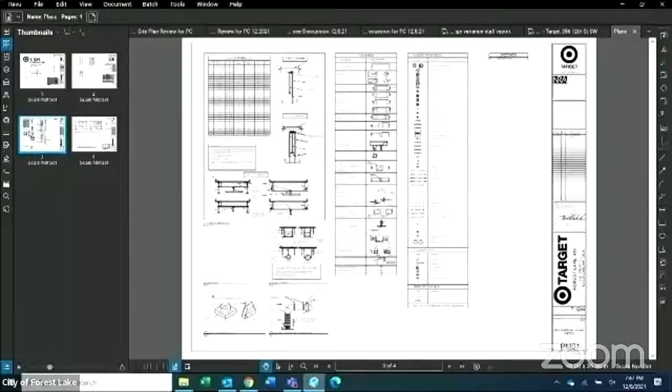Target is requesting a site plan amendment to allow additional curbside pickup parking spaces. The site currently only has 8 curbside pickup parking stalls. The new layout of the parking lot would reduce total parking by 6 spaces due to the spacing of access aisles within the new layout, for a total of 624 parking spaces. The applicant is also requesting 12 signs designating parking space numbers to indicate pickup stalls, a curbside pickup beacon, and a new crosswalk from the store to the new curbside pickup parking stalls. No other site improvements or exterior building extensions are proposed.

I will briefly discuss some of the items—feel free to stop me if you have questions. For setbacks, lot size, and building placement, the proposed site plan amendment doesn't alter the setbacks, lot size, or building placement; these were part of a site plan approved in 1999.

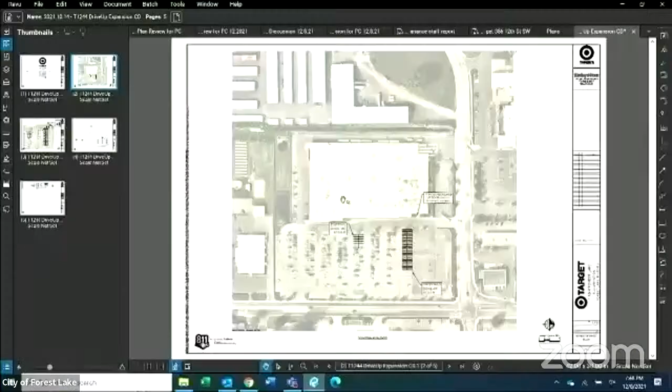Regarding parking and circulation, the curbside pickup stalls are being shifted from the west side of the property to the east side, as you can see on your screens. This is to provide a path with minimal obstacles for Target employees running out orders. The proposed parking stalls are approximately 9 feet in width, which meets current zoning code standards.

Regarding signage, a provision in the zoning ordinance allows for signage in parking areas when necessary for orderly operation of traffic movement. In this case, the signage will indicate where the pickup parking stalls are so customers can easily find them. The site plan amendment does not alter the trash enclosure, lighting regulations, or landscaping regulations for the site—we're really just looking at the additional curbside pickup and signage.

The recommendation is that the Planning Commission review the proposed curbside pickup parking stalls with the accompanying signage. If the Planning Commission finds the request conforms to city standards, it should motion to recommend the site plan to the City Council for approval, subject to the conditions listed in the staff report. I'd be happy to answer questions. Any questions for city staff?

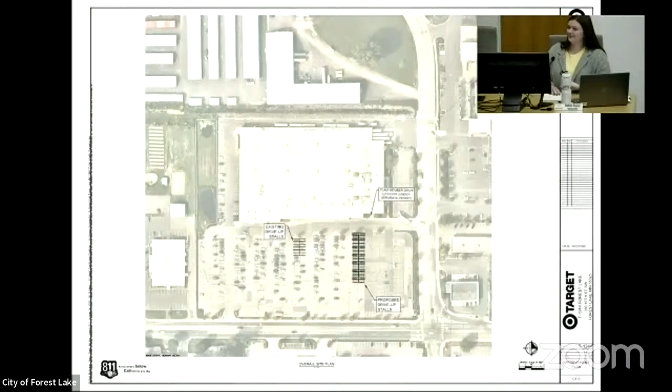Mike: Every time I look at this, I see the crosswalk for people coming out of the Target store, and then the crosswalk is at a 45-degree angle coming to the middle of the parking lot. Wouldn't it be easier to make that crosswalk straight across and move all that parking north one section? Then you've got a straight shot, everything's in line, and you don't have crosswalks going from one side of the parking lot all the way to another system—it just seems kind of weird, that's just my personal view.

I think they're trying to preserve the straight shot for customers and make the angled shot for their staff. But there's still a whole other row of parking—another double row to the north, there's 2 sets there. My point is if they moved all those stalls north one section, to me it makes common sense that it's just a straight shot—everybody's there, you can drive in and out on both sides. It's a lot of parking for the employees, but it's just a personal thing.

That's all I noticed. You go to most stores, it's a straightaway shot for all the pedestrians. You're not going at a 45-degree angle for the handicap and pedestrians, just the entrance, that's all.

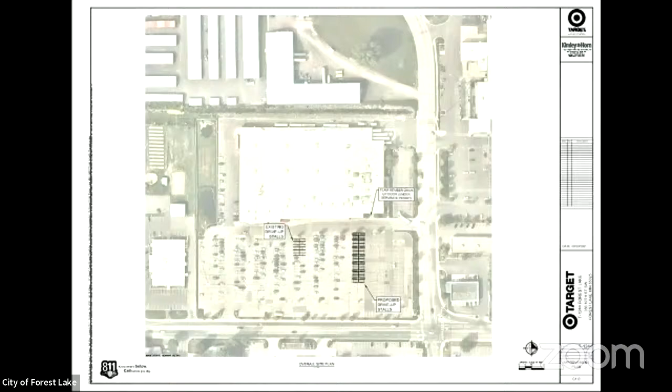Oh, you're saying because people are going to have to stop anyway for that crossing, they have to stop there anyway. So here's your crosswalk going straight up and down. I mean, it's a minor thing, just something I noticed. Yeah, I hear what you're saying, it's to do with angles and numbers.

Other questions for the city? Is the applicant here? We don't know that the applicant is here in person. I don't know if they RSVP'd online either, you know?

I don't believe so, Dan, would you know? There's a Julie Nash Smith online. I don't think so. Okay, they didn't let us know if they were interested in participating.

So we can't really speak to the circulation, the vehicle circulation on site. But if there's any other questions - any other questions, comments? If none, the chair is looking for a motion - approve, deny, or table.

Mr. Chair, I would move approval of the site plan amendment. Second. I have a motion and a second. Any discussion on the motion? Hearing none, all those in favor signify by saying aye. Aye. Opposed? Abstentions? Motion carries unanimously.

Next on the agenda is number 8, DigniCare. It's a memory care project. It's also a site plan review. Nathan, I believe you're taking us through this?

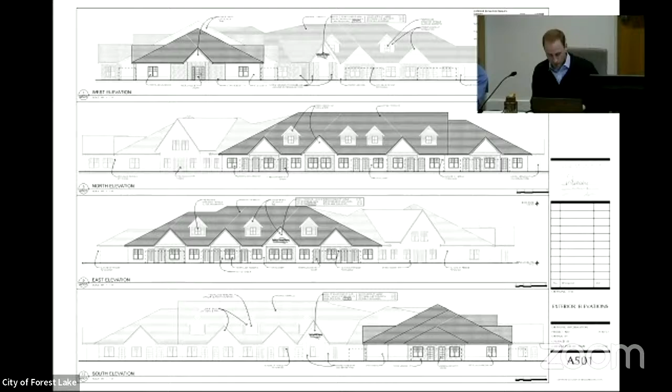There are a number of considerations the Planning Commission has. Staff have reviewed the site plan requirements and support approval contingent upon the criteria, or conditions, listed in the staff report. The applicant is here, so if you have any questions for me, I'm happy to take those at this time.

I guess we do. Susan? I'm having trouble figuring out how this is oriented on the site.

To the northwest, that's where that big apartment building is going in, correct? The CommonBond apartments. Yes, so there's apartments going in north and west of the site. That would be correct. So the site's got kind of a home plate sort of shape to it. Is the driveway and the wings of the building pointed toward the point of home plate, or is it pointed toward the apartment building?

So you're talking about this traffic circle? Yeah, does that point toward the apartment building? It points towards Headwaters Boulevard, facing south. It's Headwaters Parkway, in the Park. Okay, Headwaters. Okay.

The true north is straight up on the drawing. So even though everything about the site is skewed, the north is still straight up.

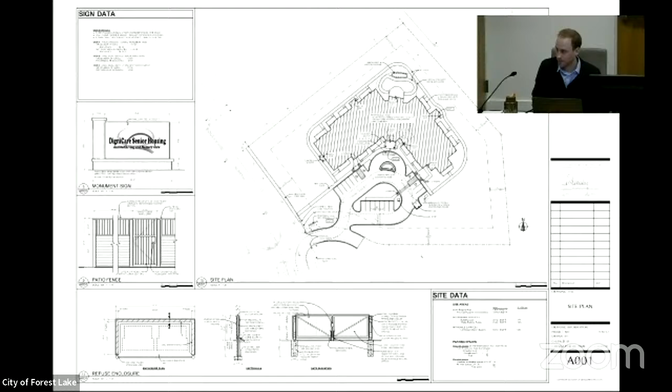Somebody else had their hand up down here. Mike?

What was the pump you were talking about with Public Works? Called a grinder pump. It grinds for the sewer. Okay, I understand, I know exactly what that is, without going into further detail. I missed the grinder part.

Susan, could you refresh me please on how we determine the parking requirement? Because I guess if there are 8 staff persons there at any one time, that would be 8 stalls, and then we assume that only 3 people ever get visited at one time, like on Mother's Day or the day before Christmas. So we use the standards provided for nursing homes, sanitariums, and similar uses, that's what we're reviewing against. The applicant, I believe, is suggesting the number of stalls they believe they need. I would refer you to ask them that specific question.

Well, what's the required parking based on? What did you use for your required parking?

11 stalls are required per review. Thank you, I was wondering what the criteria was. It's for nursing homes and similar facilities, so we're using a similar type of use.

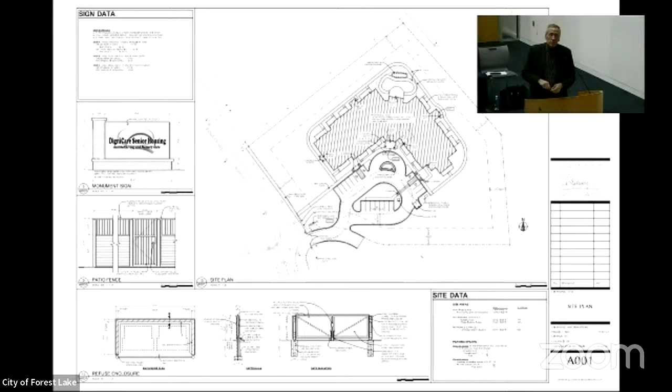A building this size, how many employees are on staff, what's the most employees on staff at one time? The best ratio would be maybe during the heaviest part of the day — lunch is usually the heaviest part of the day. I would say 8 to 10.

I was looking at the parking, the way it's laid out — it comes from building after building after building of history. And if we needed more parking, it's not like we don't have room, we'd put it there. So that's just using historicals. Thank you.

Other questions to the applicant? I just have one.

Is the eventual, I guess I'll call them clients, are they all privately paid, or is there going to be a portion that might go to citizens who are on any type of public assistance? We always have about 20% that we set aside for Medicaid, and people think we're nuts, to be honest, because most of the big places won't take Medicaid. We tend to look at it a little differently, because some of the best referral sources are those county case managers in the hospitals.

Once they know that we're the go-to guys for high acuity, well, turns out we take CADI waivers, TBI waivers, CAC waivers, and these. Because we're the go-to guys for those high acuity people, it turns out some of those county waiver people end up paying more than the private pay.

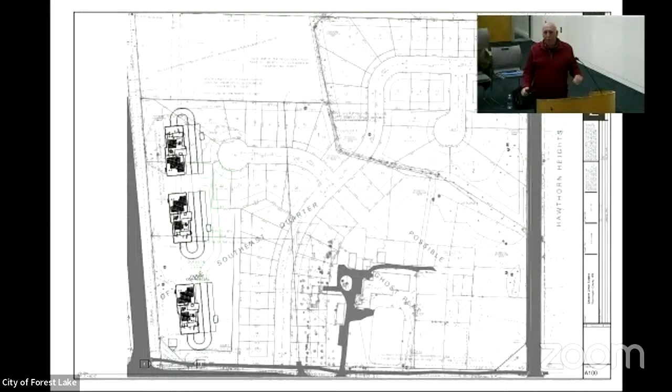Maybe that's fourplexes around that — we transition from the apartments, maybe to some fourplexes, and then bring it into the single family kind of around the park there, to meet up with those other homeowners on the north. So that's something we can look at, and we have builders that are interested in that.

The apartment complex, I think, would be best served with just 2 buildings, but if we went to a third, obviously we're up to then 170 some units, 180 units. That cul-de-sac goes away.

So I've kind of gone back and forth on some of those things, trying to come up with the best use for the property. That's my job, you know, as a planner, surveyor, and engineer — that's what I do. And it's just, I really got kind of, I think I've looked at it too long.

I actually have been looking at this property for about 4 years. I made an offer to the Moores earlier this spring, and we came to terms this summer. My wife and I are looking at occupying the property for at least maybe 10 years and keeping it going as the business that exists today.

I feel like that's a whole other discussion in terms of the horses and the livestock and all that kind of thing — was it grandfathered in, where do we go with that, what do we do? I just feel like that's going to be separated off in the plat, and that should just be for another discussion for us. I don't know.

What else did I have? So you're looking for 60-foot wide lots, and looking at just the lot sizes, looking down on the 8,000 square foot area — this zone is 80-foot wide lots, 15,000 square feet. It's quite a decrease. I'm not sure how that fits the density that the city's looking for. It's zoned for a density much higher than what we're looking at. So I'm not really sure.

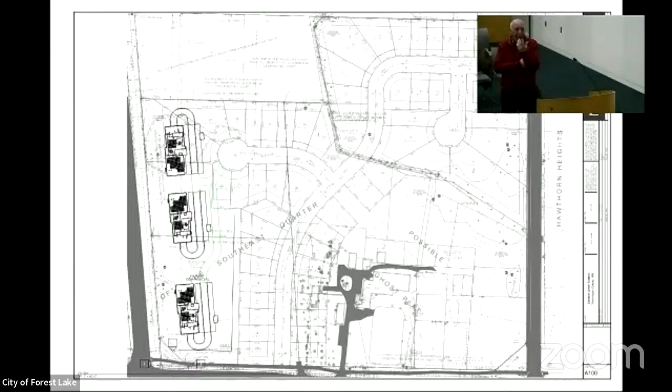I think, Mike, in terms of, I feel like with the park up there and the homes, that has to be single family or detached townhomes, if you will, whatever. But something along those lines.

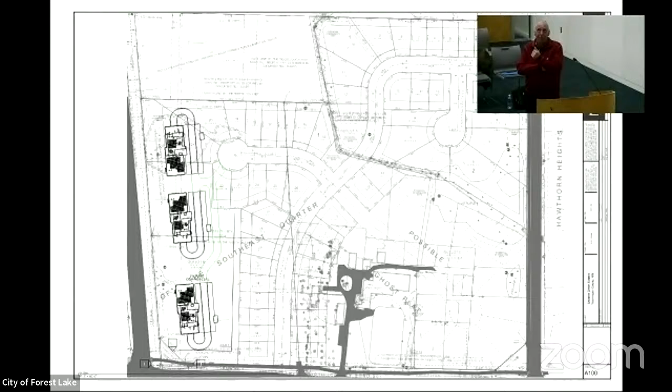We're really looking at 2 apartment buildings, so that one you see on the north there - one of my plans had kind of slid that further south building, angled it, and then dropped the other one down a little bit, and then that cul-de-sac stayed up there on the north for the most part. A lot of ponding up there, a lot of ponding along the highway, just a lot of ponding, period, and once we get into the hydraulics of that, that'll kind of dictate what we can and can't do too. Susan?

And more than one way in, and the same way out. That is already a challenging intersection at 202nd and 61, and it would not be good to make that any more challenging than it is with additional entrances.

Well, I was going to say, I think when the fire chief looks at these diagrams of those apartment buildings, he's going to say there's no access for fire prevention on the other side. On the 61 side, we have a 100-foot ladder truck here, but if there's anything on that 61 side, how are they going to get to it? They won't let us enter it on the 61 side, so maybe think about that.

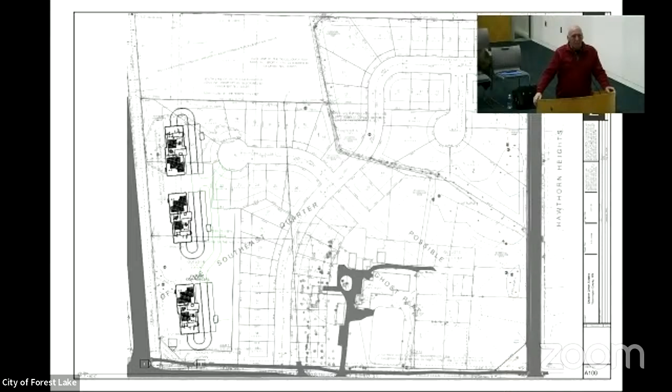Down from Headwaters a ways, across from the YMCA, we put in some buildings there and they have basically a walkway for all the tenants, but it's accessible with a fire truck so they can get to both sides. And then they'll also prefer a fire hydrant somewhere back on that side. It's just something that's going to pop up.

Typically, when we see a concept plan, the developer has fleshed it out pretty well, and we're sort of sanding around the edges to fit what we need as a community. This, don't take this wrong, is rough at its best. We know these roads are going to move, we know the access to these apartments are going to move. I don't see any parkland in here yet. So you got some free information tonight, and you have fulfilled your concept plan requirement to see the city. The next we would see then would be a preliminary plat.

But you're going to sink a ton of money into a preliminary plat. My suggestion would be to have another concept plan review after you shake this out and save yourself a fortune. Yeah, our plan was to come back for the January meeting with another plan that we can hash through, and we have exhausted a lot of resources already in planning, design and engineering.

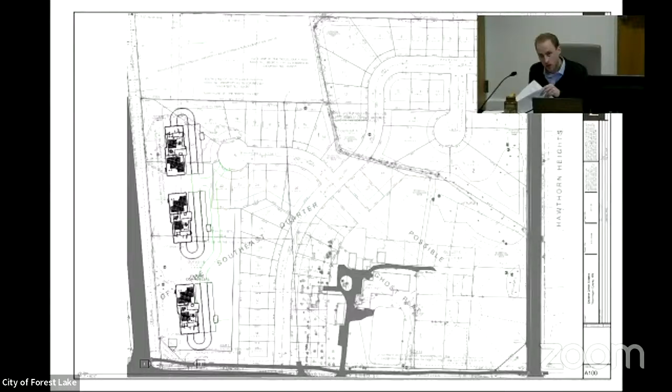Mixed use has a density of 10 to 15 units per acre. High density residential has a density of 15 to 20 units per acre. Okay, so are you telling me that the eastern piece is 10 to 15 and the western piece is 15 to 20? Yes.

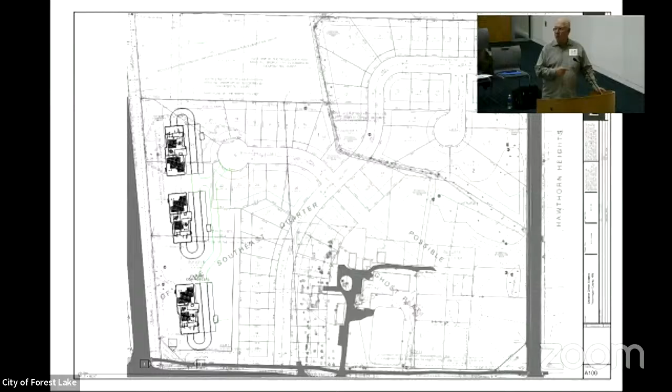So that's not what we were saying. We were saying 10 to 15 on the west. But if, as you look at this property, and you think that you can bring a better, more saleable product, as Mr. Moore knows, it can be rezoned. You can ask for a rezoning. Those things are possible, but we just know that you have a desire for mixed use, to get the best return on your investment.

And yes, our comp plan says more apartment buildings. I think that folks on the planning commission have heard that there's a community desire to not have quite as many as in the comp plan. But, you know, kind of, what do you want to do with the property, but then it has to be a good product. Okay, and my concerns right now with the way you've got your apartments are, if you try and do the apartments and the single family, I'm concerned about your flow through and safety.

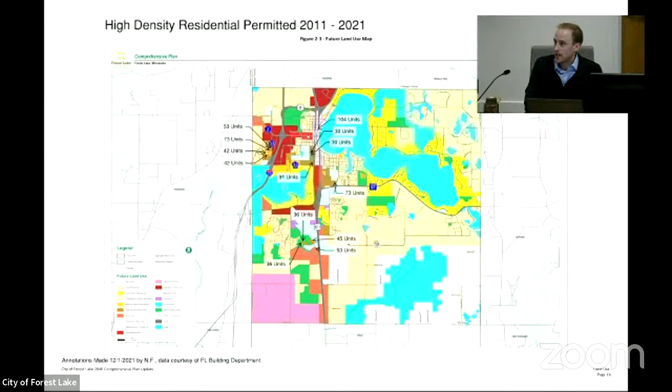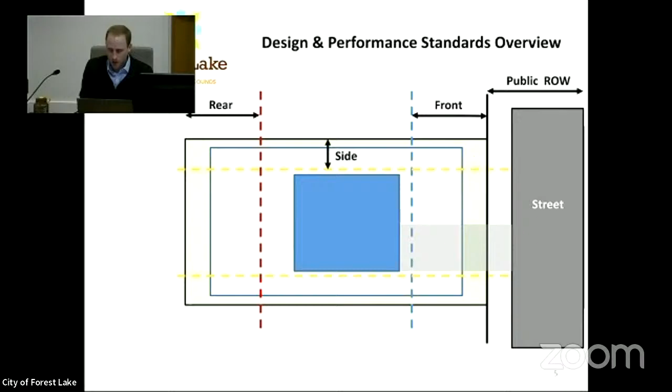In the MXR1 zoning district, the side yard setbacks are 10 feet. Front and rear setbacks are 30 feet. There's also a lot area requirement of 15,000 square feet, which applies to all property boundaries. You can see shaded in this property a sort of green-gray shade used to depict standard easements. Drainage and utility easements are required on platted lots to ensure that drainage over the entire landscape works, as well as in the front yard, where utilities use the front yard drainage and utility easement for provision of utilities. So these are all the things we're considering when we talk about these standards.

Here on the slide and in the staff report are the existing lot standards. One of the questions brought up during the previous agenda item was, what is detached townhomes? What does it mean when it says HOA? Detached townhomes in this context—and this is a nebulous term right now in development—mean a smaller lot. They don't necessarily mean a specific type or style of house. In this case it's the size of the lot and the standards that come with it.

Where you see an indication of no lot area requirement if there's an HOA, that's an abridged paraphrasing of what the requirements would actually say, which is: if there's common ownership of, for example, a large area and then building pads, a minimum lot area is sort of moot in that case. So there's no requirement for that, because we're assuming you're going to be over a certain acceptable amount.

All they're essentially buying is the pad that the house is on, correct? Yes, that's correct.

In the staff report and here on this slide, staff are proposing, or just basically for the basis of discussion, supplying something to consider in terms of how to amend this zoning district. Staff did sit down as a team with various staff members and worked through what these might mean. The main change here is to lot width and lot area. Those two standards, if changed, would bring this district a little bit more into alignment with the future land use that accompanies it.

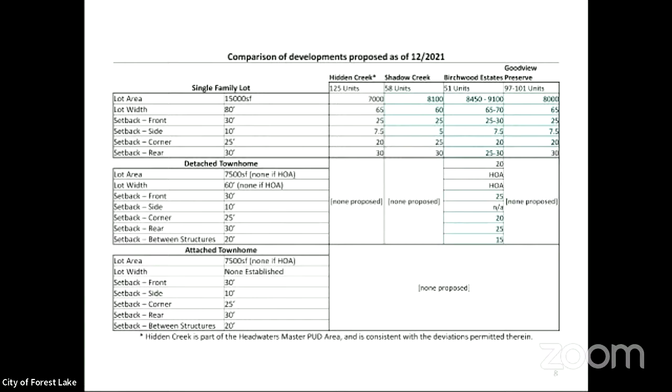I should say any cells shaded blue are where a deviation would be required from the actual current standard. So, side yard setbacks show a range of requests from 5 feet to 7.5 feet, standard being 10. Rear yard setbacks are mostly within the actual current standard. And specifically with the Birchwood Estates project, they'll have to request a couple of deviations for detached townhome products, so smaller single-family lots.

So that's what I had prepared for you in terms of information. I'm going to bring it back to this slide here for the purpose of discussion and questions.

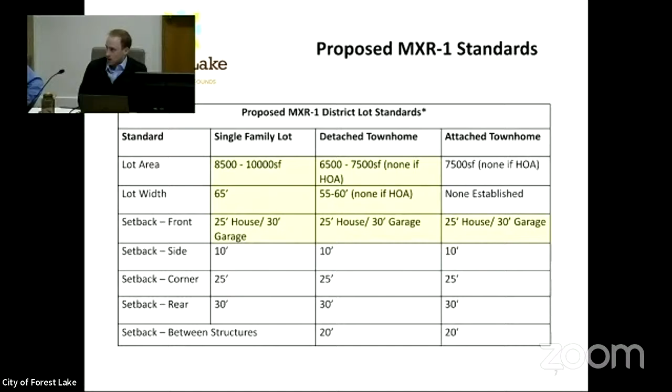Did I see in the stuff I looked over this weekend that essentially MXR is about 60% of our developable area? So whatever we decide is going to be our MXR standard, that's going to be the vast bulk of our development.

So this is what Forest Lake will look like in the future. As we think about it, what do we want our community to look like? What do our existing residents want the community that they bought into, that they thought they were getting, to be? And how do we set ourselves either just like everybody else or as a unique community?

Because whatever we decide here, we've got a little commercial, maybe 10 or 15%, and then we've got a lot of apartment areas. But the majority of almost all of our residential, if it's not an apartment, it's going to be this. So I just want to make sure that as we think about these standards, what that density is going to mean for the services this community is going to have to provide - consideration on police services, fire services, plowing. Very clear, you get more dense, you have more people, you have more demand, more impact on roads and parks and everything.

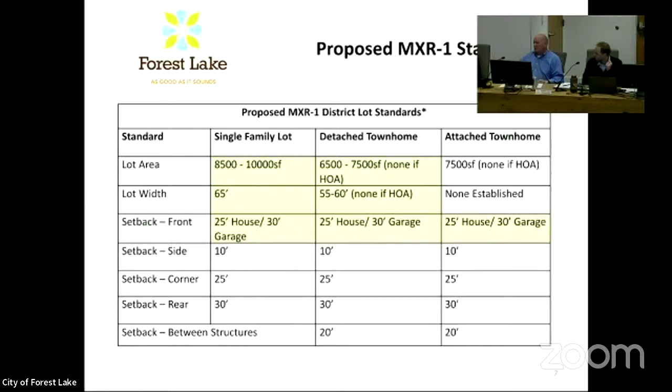The only pressure that we've heard to make lot sizes smaller has been from developers. We heard nothing when we were doing the comp plan and asking people to design neighborhoods, we heard nothing about making lots smaller. But you might not hear it with their voices, but my thought is that you're hearing it with the lots, what they're buying, because dollars, if they're buying the 65-foot lots, they're buying what's available. It's obviously a market-driven thing. Whatever's on the market and they can afford, they'll try to buy.

New development, developers are trying to make the most money they can out of it, so smaller lot sizes mean more houses. However, you would hope that the starting price of those houses would be less than your standard house, but in this type of current market with houses, that's not happening. Your starting houses are starting at $400,000, and whether that's affordable for some or another, that's the other decision you're trying to make: how affordable are you trying to make your housing stock for people to afford to come here?

And does a 65-foot lot width, and the house that can be put on it, make a big difference in the sale price and what's available to people? So does it really make that much difference? We don't have answers to those questions. I don't know that. But it's really about the standard of your community and what you want it to look like. Does it really impact, with a 65-foot lot, the house that's going on it? Does it really make a big difference or not?

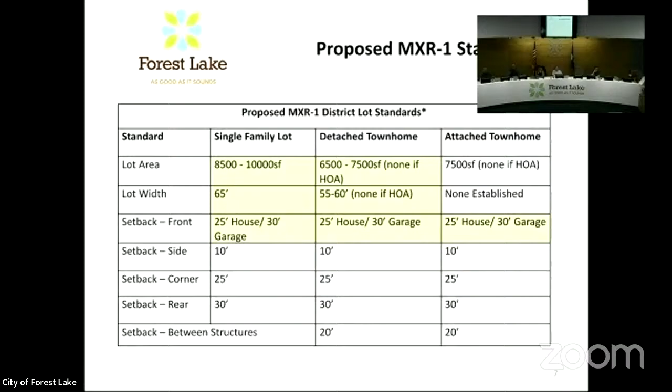Oh, it's available, that's all it's available. We don't have much of that built that way currently because our lots haven't gotten real narrow. So you have the garage - help me out, what's that term with the house to the side there, you got the garage door and then, okay, we're saying it's not aesthetically nice for neighborhoods to have that 3-car garage in the front.

And when we say we don't want that, people must want that more than the aesthetic neighborhood, otherwise they wouldn't buy it. When we had the developers in here, the one that had the smaller lots, he pointed out that he's got a front on the house. Yes, so they have streetscape.

And then could they do that on a 65-foot lot? They were doing it on 60s with, I believe, a 7.5-foot side setback, which is the same as a 65 with a 10-foot side setback. So then maybe that's kind of the caveat, that it has to have a certain percentage of home front.

Yeah, I don't know how you do that. That's what the geniuses do on staff. How much home front? If you have the person who has to have the 3-car garage that faces the street, that a certain percentage of that square footage or the base footage, if it's, what, 40 feet, 45 feet? You get about 45-foot wide.